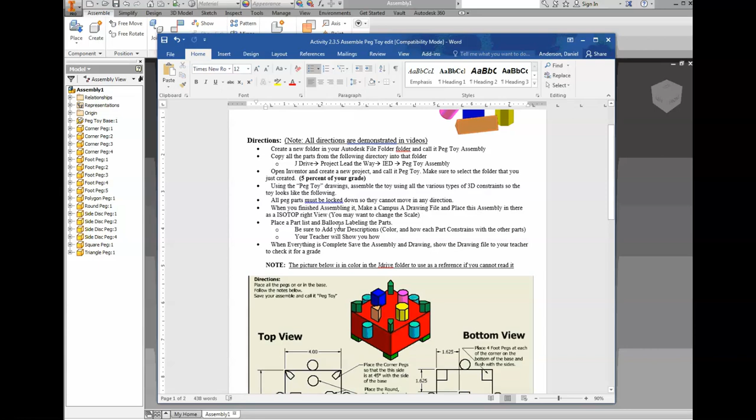Well, I looked at my directions. When you are finished assembling it, make a Campus A drawing file and place the assembly in there in ISO top right view. Then it says you may want to change the scale, and place a part list and a balloon, but we'll get to that. So first things first, Campus A drawing.

So first thing I'm going to do is save this. I'm going to call it Peg Toy Assembly or Assembly 1. It looks like there's no files in there, but that's because there's no assembly files. The other files are in there, I promise. But name it and hit OK.

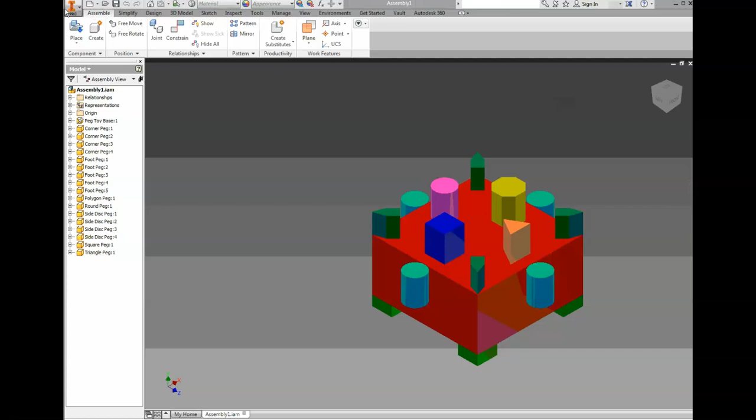Once you've saved it, now you should be able to place it in a drawing file. So I'm going to go to New, and I don't want to go to Assembly, I don't want to go to Part. I want to go to Drawing, and I want to go to Campus A Drawing. And I'm going to create it.

And you should get this file opened up. You want to make this look nice and professional, so you're going to type these in. I'm going to go ahead and pause the video while I type mine in, and make sure you make yours look professional. Once I'm good, I'm going to hit OK.

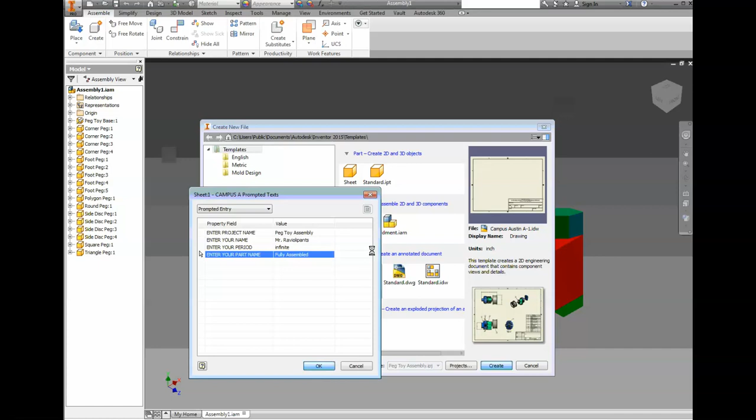And I have my Campus A drawing, and everything's filled in, okay? To drop a file in, you might recall, you go to Base, and then you make sure you select ISO top right or the home view. And I'm just going to place it in, and you might notice it's a little big.

So once I place it in, I want to make it a little bit smaller. So I right-click OK, and I go down to my red dot surrounding it to go back and edit it. And I'm going to tell it to be about half that size. I'm going to see OK and see what it looks like. This looks a little bit better, I should say. And if I want it a little bit bigger, I can make it a little bit bigger, the size that's appropriate.

But I want to make sure I give myself half of the screen. I want this right half blank because I'm going to place a part list in there. That's what my directions say to do: make sure to add a part list and balloons.

So how to do a part list? Well, I'm going to go to Annotate, and I'm going to select Part List. And it wants to know what part or what list of parts would I like to get from. I'm going to make sure I have my Peg Toy Assembly file selected, and I'm going to hit OK.

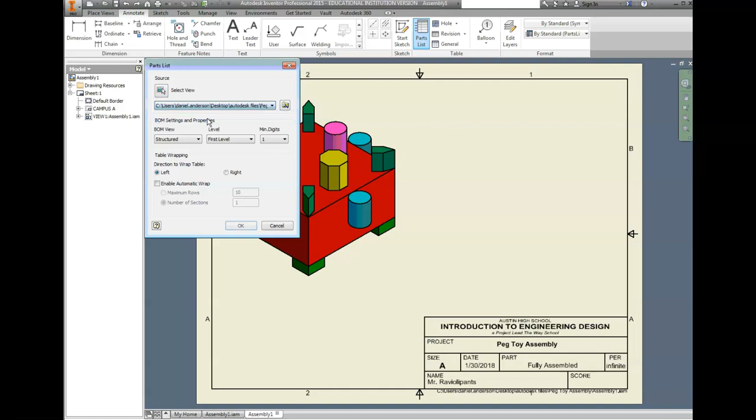Do not worry about this. Hit OK, and then you can drop it in. I'm going to drop it over here in the top right corner. And if you look, it's already filled out for me. Look, it tells me all of my items in order that I placed them in and how many of each I have. And then it even tells me the name of each, and it leaves a blank for our description.

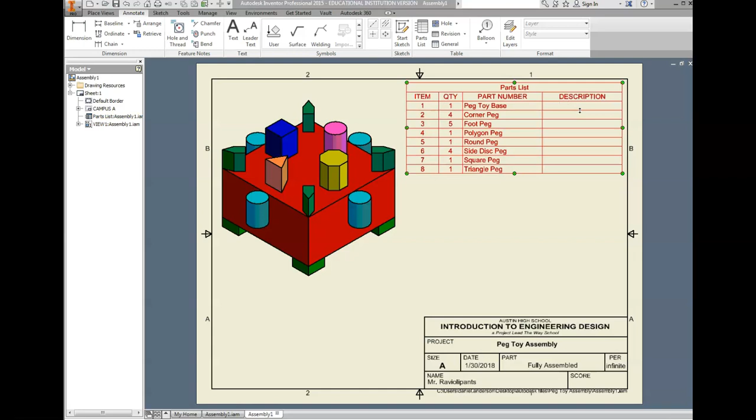We are going to add the description now. So what I'm going to do is make sure it's red, and I'm going to double click, and I can type in whatever I want. So I click on one, and the Peg Toy base, it wants to give a description.

I want you to describe how it's assembled. So the Peg Toy base, well, there's not much to it. It's grounded, it's the grounded piece.

All other parts are connected to it, and you're going to give a simple common sense answer for all of these. If you don't remember, you can use your document to help you, or the picture to help you. But I don't want you to make yours look exactly like that, it's too much work. So for example, the round peg.

The round peg was inserted in the round hole.

Whereas the square peg is mated and flushed in the square hole.

And the corner peg, we could say, is mated to the top corners, 45 degrees. Or I could say angled off 45 degrees from the sides. Go ahead and give all of these common sense names.